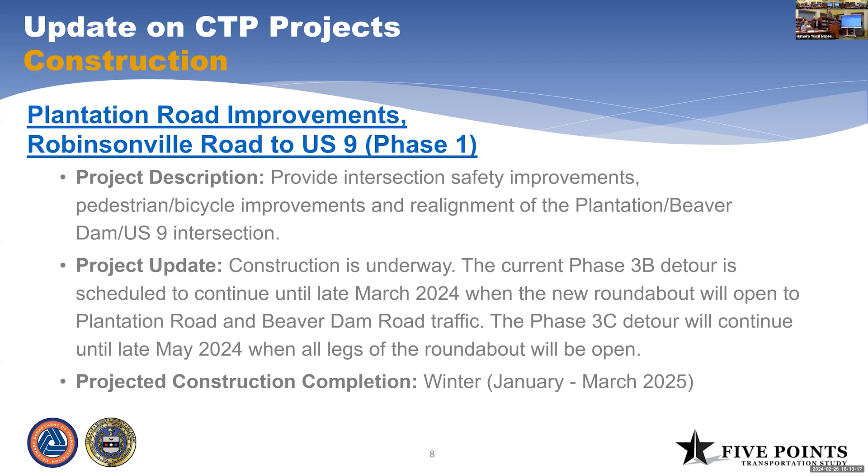I've met a couple times with the group to talk about Plantation Road, so I figured I'd give an update on where we're at. For anyone not familiar, it's a project at 5 Points where we're adding a roundabout off to the west of Plantation Road to help with getting traffic through what's unfortunately known as Malfunction Junction. The project's been underway for about a year now, and we're right in the middle of our very impacted detours that have been going on since around Thanksgiving.

To start, going back in time, we closed Plantation Road, Beaver Dam Road, and the Route 9 connector back in November. There was a small subphase where we had to keep that Lowe's entrance open. As everyone knows, Lowe's has 2 new entrances built off of Shady Road, so we were trying to make sure everybody could get in there for the Christmas holidays. Once they finished that, we switched and moved the road closure down. As far as the traveling public went, everything pretty much remained the same.

The detour was next. So the next big thing that's going to happen, we're almost into March. As soon as we can get the hot mix plants open back up and weather starts to break, which seems like it's happening now, we're going to get this thing paved and reopen the Plantation Road to Beaver Dam movement for everyone, so we will not have to go around that. Now with that, this is what's going to be open out there.

As you can see, we'll have Plantation Road, you'll be able to use the roundabout, continue on Beaver Dam, but we're still going to keep the connector to Route 9 closed. So there will be no way to get from Route 9 to Plantation Road outside of the detours we have in place now. That's a little more complicated getting that connection finished, so we're going to be working on that and have it open by May, probably middle of the month. Once that's complete, for all intents and purposes, we'll be operational in the final configuration. We still have to follow up and complete work on Plantation Road itself.

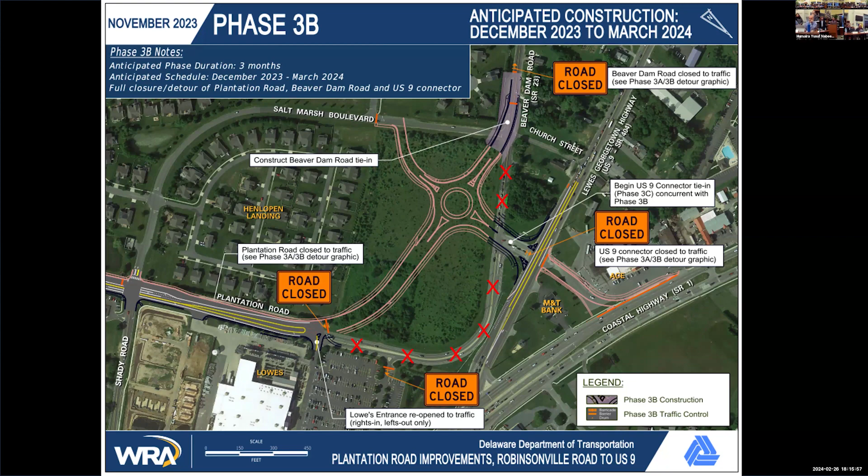Thank you. All right, so the plan is in May we'll get everything open and operational, and then we'll have about another 9 months or so of work to continue on Plantation Road. It's kind of slow going, but we're going to maintain all the traffic capacity there and be minimally impacted unless necessary.

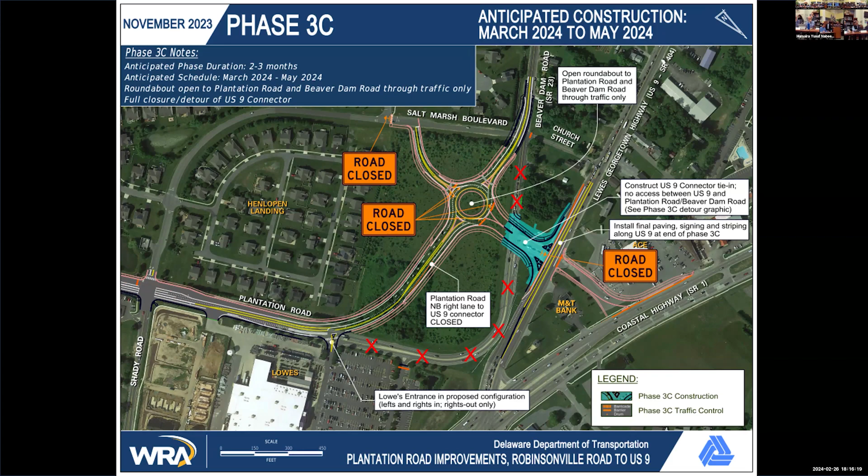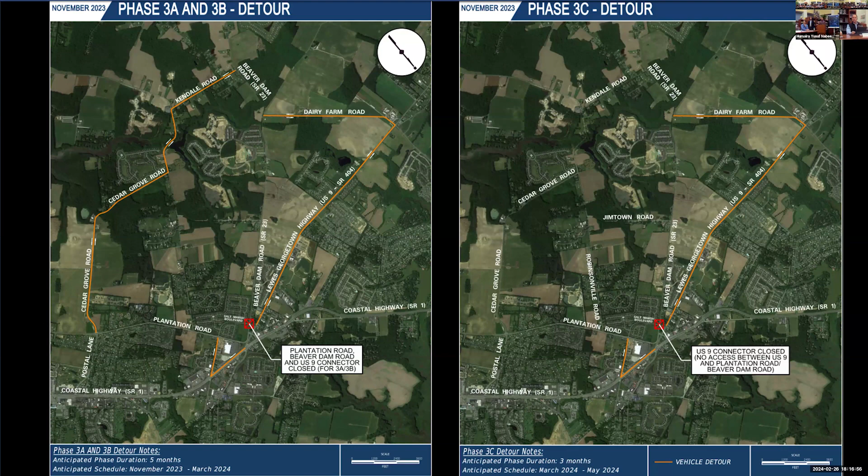These are the detours we have in place. I don't think I really need to go over the routes - everyone's been taking them for long enough now. I will add that before we put the detours in place, there were some concerns with some of the intersections on the detour route or alternative roads people are using. Our traffic section did add a four-way stop at Beaver Dam Road and Dairy Farm Road, and also Robinsonville and Cedar Grove Road. As it stands right now, they're in the data collection phase to see if they're going to remain in place once we pull the detours, because we're sending a lot of traffic there. We're helping to mitigate it, and we'll see moving forward what we do with that long term.

Other than that, that's pretty much all I have for the project, and I will hand it over to Sean. No, not yet. All right, not yet. So a couple things.

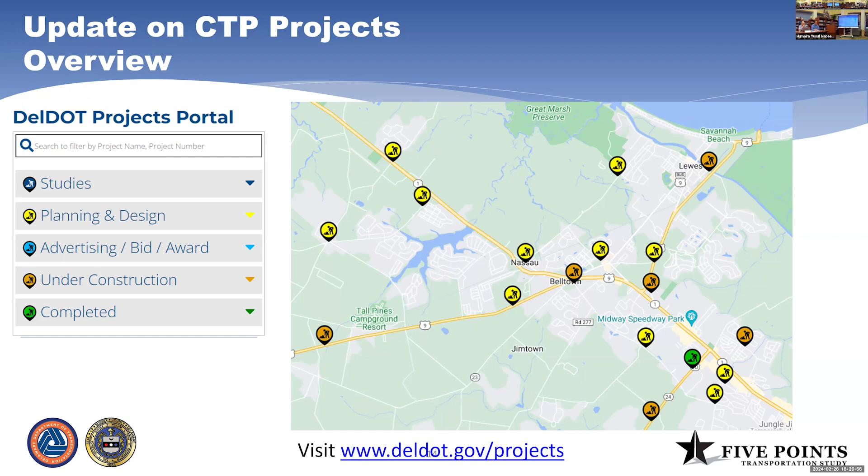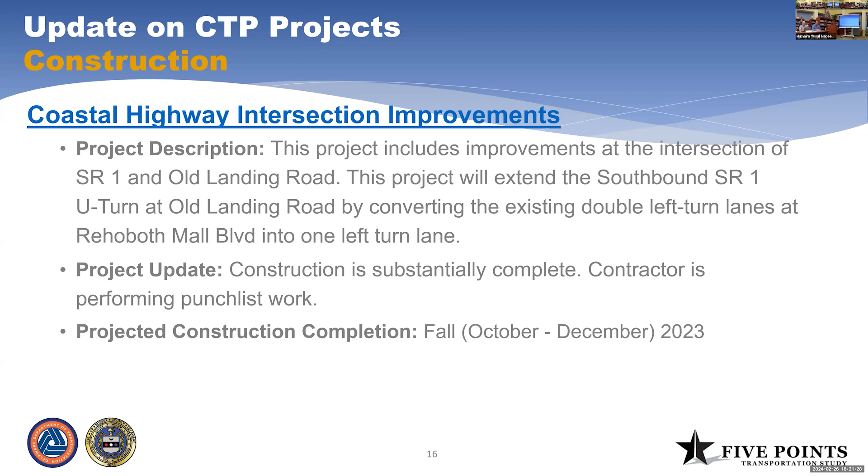We're going to roll through construction projects first. As many of you know, we did a small intersection improvement project at Route 1 and Old Landing Road, lengthening the left turn lane in the southbound direction. We thankfully got that open right before the holidays last year, so that is substantially complete. It was easy in terms of being able to use the existing roadway, reconfigure it, and make a huge operational improvement as well as safety improvement. You can see it right there in front of the shopping center.

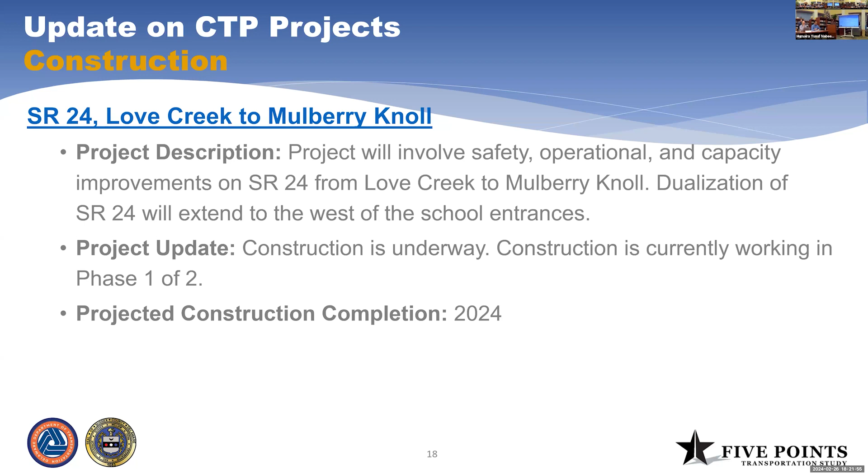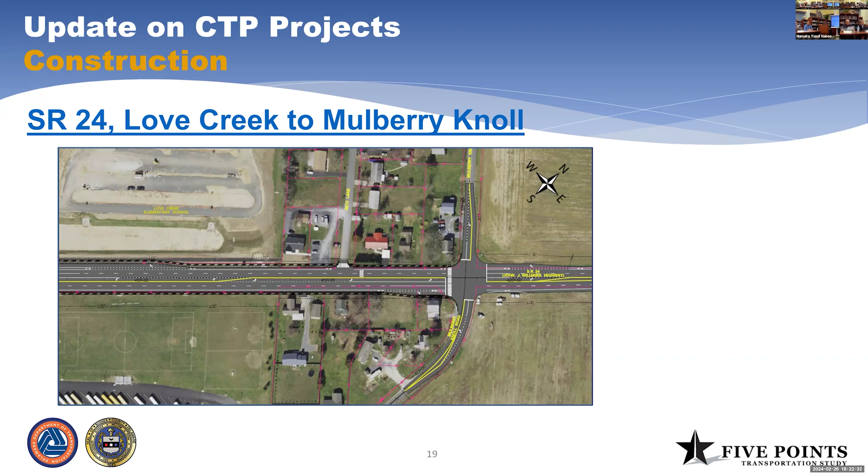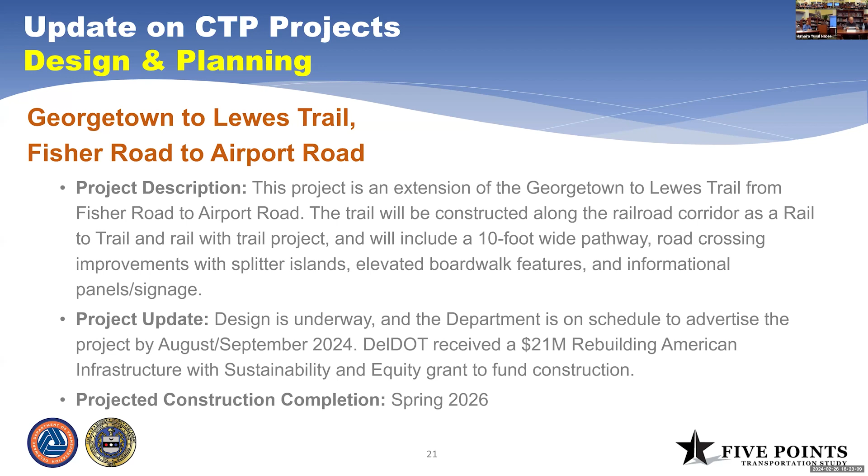All right, moving to our long list of design and planning projects. The Georgetown to Lewes Trail—this is really the last segment to get done. It's a long segment to complete the 16-mile bike trail from Lewes all the way to Georgetown. We did get a $21 million RAISE grant to complete the construction, so that project is wrapping up design. We plan to begin construction hopefully later this year or early 2025, with completion in 2026. We're really excited about this project—it's a really viable way to get from Georgetown to Lewes without adding to the traffic craziness we experience all the time.

The new road bridge, Bridge 3-714, we have the design underway for that. We plan to begin the advanced utility work in the fall of 2025, and then construction for the actual bridge project itself would happen the following year. We have a lot of utilities to move. This project will both raise the bridge as well as the approach roadways to deal with the daily flooding we're experiencing on that road.

The reason for the delay in construction start was twofold. We have wetland mitigation that we have to do for the project, and so we actually had to go out and find land to be able to do that mitigation. A lot of times we're able to mitigate right on site, and we weren't able to do that for this project, so we actually had to purchase property. We have to get the mitigation site up and functioning.

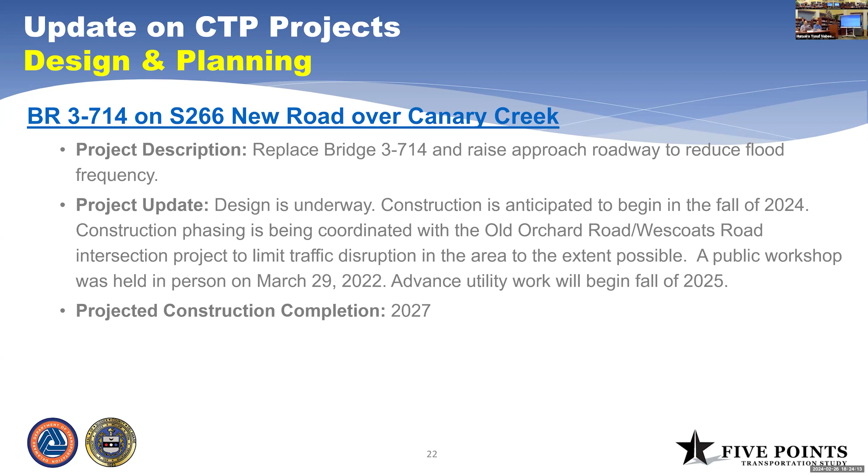That takes a little bit more time, and we're coordinating this project with Old Orchard Road. We didn't want those two to be under construction at the same time, so we're pushing forward with Old Orchard, and I'll talk about that in a little bit. This project will follow on afterwards. You can see the rendering for it, raising it to get it out of the flood stage and raising the approaches.

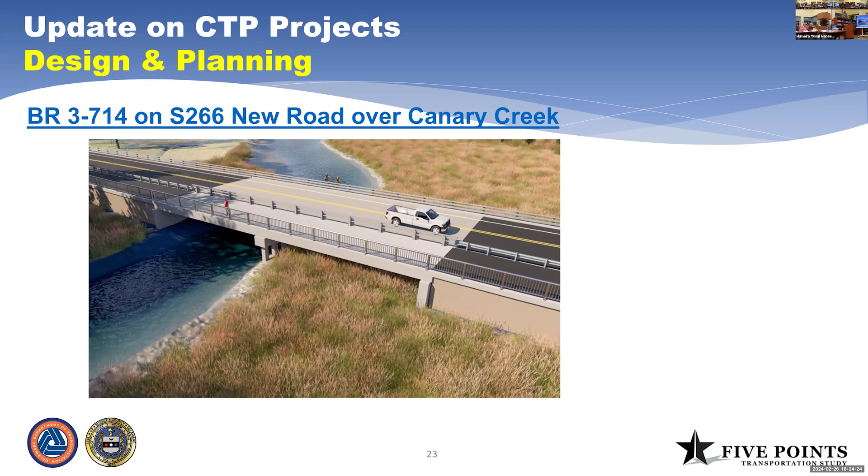We have a couple of projects at the Hudson and Steamboat Landing intersection, Eagle Crest and Oyster Rocks intersections south of 16. We're looking to channelize left turn movement both on Route 1 as well as coming off of the side streets. But we have to coordinate that with the 1 and 16 project, and also with a lot of the events that are now happening at Hudson Fields. So we're still analyzing what we need to do there.

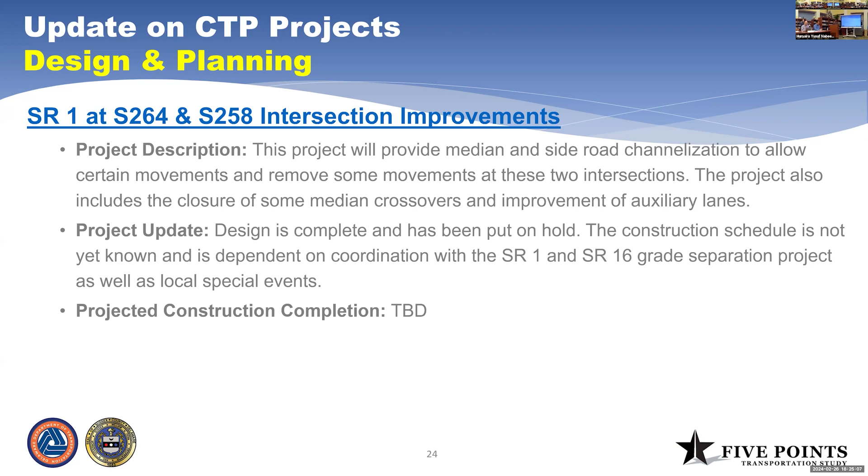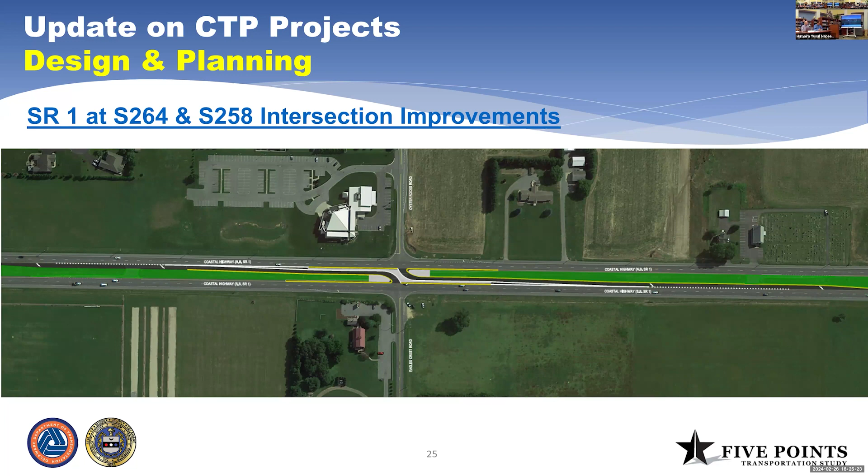This project is a TBD in terms of beginning construction, once we figure out the best path forward in terms of how to channelize the lefts. As it stands today, at the Oyster Rocks, Eagle Crest intersection, we were looking to allow left out movements there. But if you're making a left from Route 1 onto either of those side streets, you'd actually go down and make a U-turn. Hudson Road was the opposite - you'd be able to make a left from Route 1, but any left out movements would have to do a right turn, U-turn, and or use Eagle Crest. More to come on those once we have a better path forward.

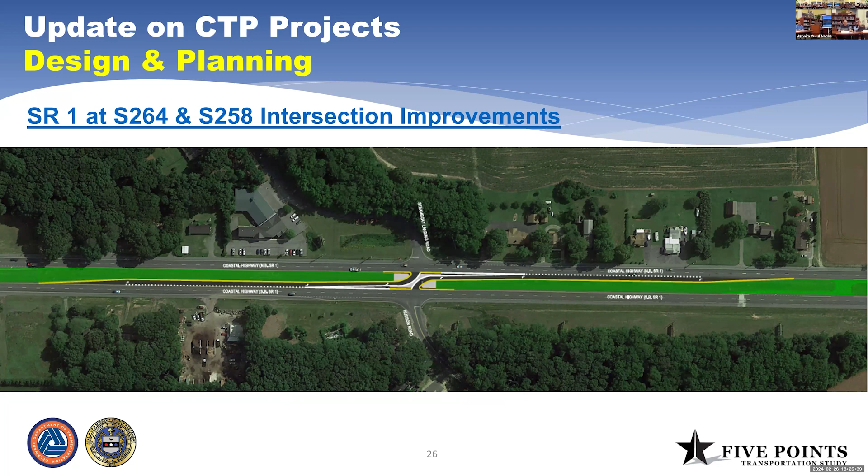We'll do a couple on Cave Neck, Hudson, and Sweetbriar Road. This is a project that we coordinated with the county with what we're calling the fast track funding, where the county advanced funding for us to be able to begin the design, right of way, and construction, and then we will pay them back when it was scheduled to go to design in our CTP, which is much later. We are planning a 5-legged roundabout at that intersection. In the interim, we did do the all-way stop.

As somebody who goes to the intersection twice a day, it has made a huge impact in terms of safety. You're no longer holding your breath, wondering if somebody's going to come from the side and you're not going to see them. But the roundabout is the ultimate solution there. We are acquiring right of way currently, and utility work will begin in 2025 on that project.

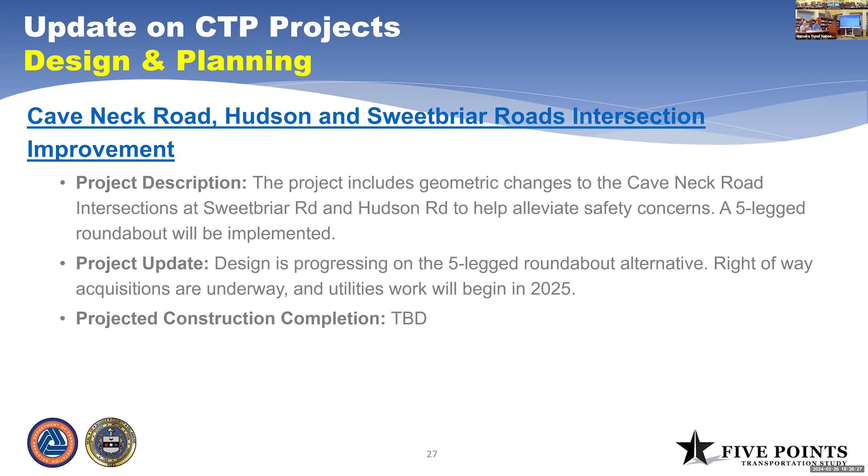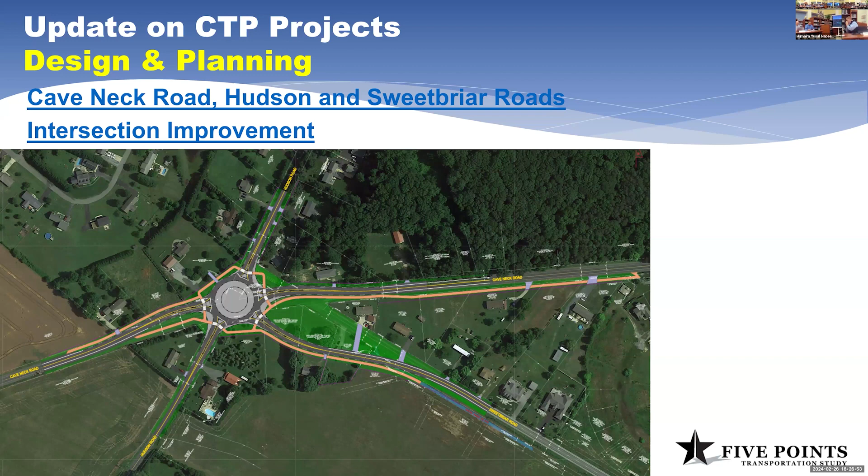But keep going, Shante. So this is the schematic for Cave Neck, Hudson, and Sweetbriar, having the shared use paths and being able to accommodate all of the different movements at those two closely spaced intersections. Next is the Cave Neck grade separated intersection project.

That project proposes a bridge basically to carry Cave Neck from one side of Route 1 to the other, along with service roads to be able to facilitate access for the properties along Route 1, both to the east and west sides. We are acquiring right of way currently, and the design is progressing really well. We anticipate beginning construction in the spring of 2026.

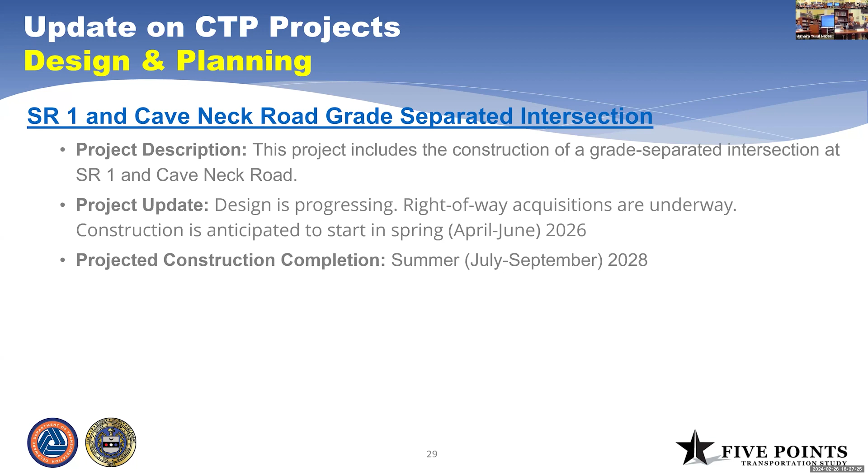And this is the concept for that project. You can see the bridge across Route 1, connecting both sides of Cave Neck and the service roads up and down, also connecting some of the roads that intersect with Route 1 further to the south.

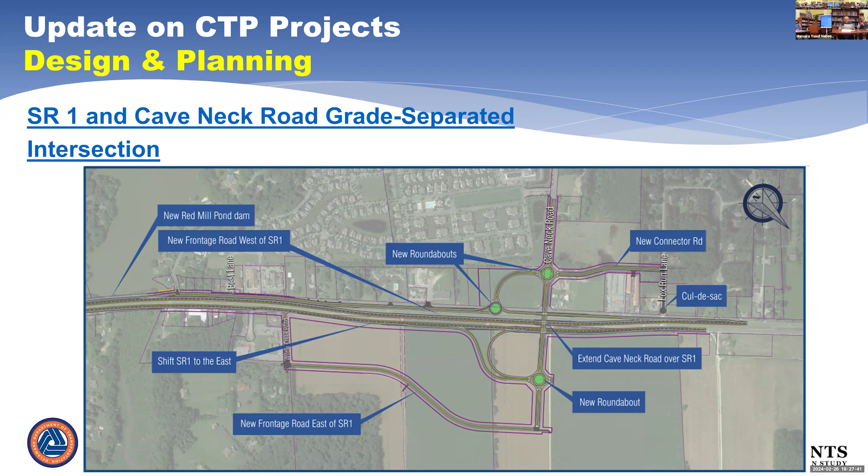Route 1 and Minos Conaway, also a grade separated intersection project. This one, we actually get to use the bridge, the Nassau Bridge that exists today. We don't have to build a new bridge, but we'll be building service roads on either side of Route 1 and making a new connection under the bridge to get over to New Road.

That project, design and right-of-way acquisition are just about wrapping up, and we hope to begin construction later this year. This is the southern section of the project. You can see the two roundabouts that connect under the Nassau Bridge, and then further to the north, connecting all the way up.

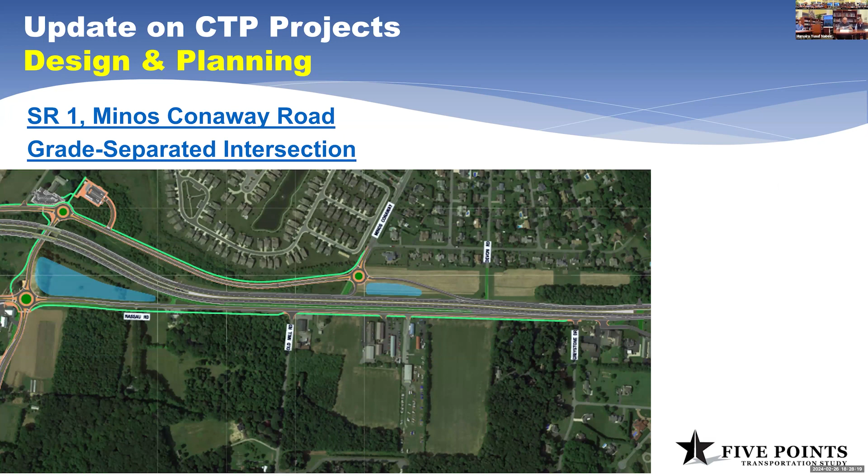Talked a little bit before about the realignment of Old Orchard Road at Wescoats Corner. That project is going really well. Design is nearly complete. We've got right-of-way acquisition just about wrapped up. We have some advanced utility work that is underway.

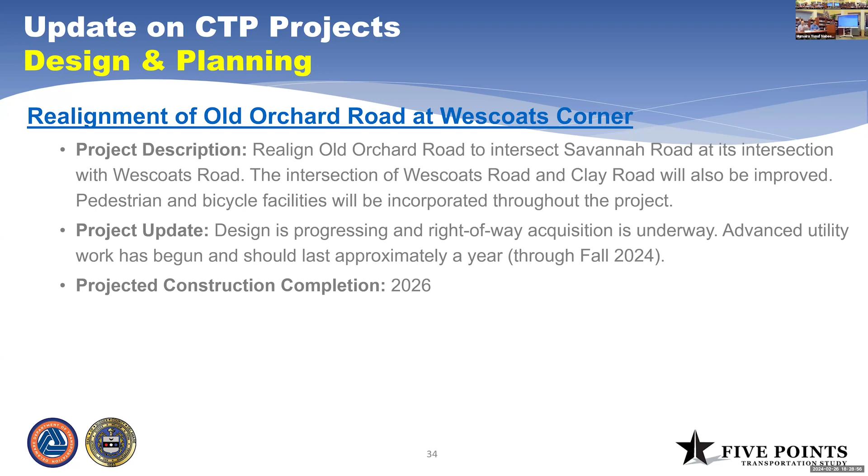So this, where it says through fall 2024, is actually through next year. We're going to have a little bit of overlap with the roadway construction and utilities, because we anticipate beginning road construction sometime next spring or summer. And a lot of the preliminary work for this project will be what we call off alignment.

Yes, Bob? Bob Fisher again on the graphics. It appears like a number of these graphics are either missing traffic lights in them, or there is some sort of code that I don't know, that indicates there's a light there without the little red, yellow, green.

Yeah, we can add that, Bob. So this is already a signal, so that's why we don't have it. We typically would put that if it was a new signal, but I hear your point, and to make it clearer, we will go back through and update these.

So are these graphics that you're presenting in general only the changes that are being made, and not the way it's going to look when the whole project is done? That's new to me too. I thought that was the way it would look.

So that's a broader question - you all, whatever you decide. Yeah, we can add the graphic for a signal there. We typically haven't done that. If you look historically, if there was a signal there, we didn't put a new signal graphic, but I get your point, and it may be confusing at first, especially when we're doing some kind of new connections. People may think that you're taking the traffic light out if you don't show it at the final project. That would be my only concern.

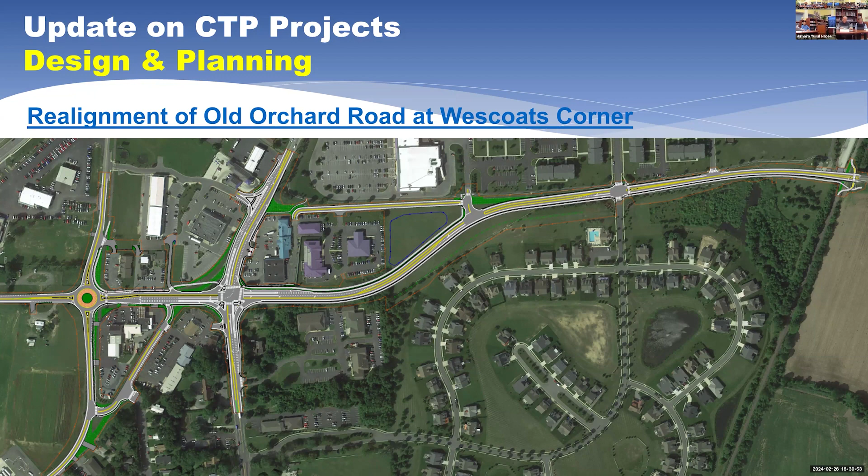In terms of traffic impact, we may still be finishing up construction on this project, but as long as all the lanes are open and everything, we can start the road. Right, but just want to clarify. Thank you.

Route 9 and Kings Highway, so that project is under design. We did have a public workshop last week on that project. We are still kind of finalizing the overall design, so had the workshop, we'll be taking comments in through, I think, March 22nd, I believe is the date.

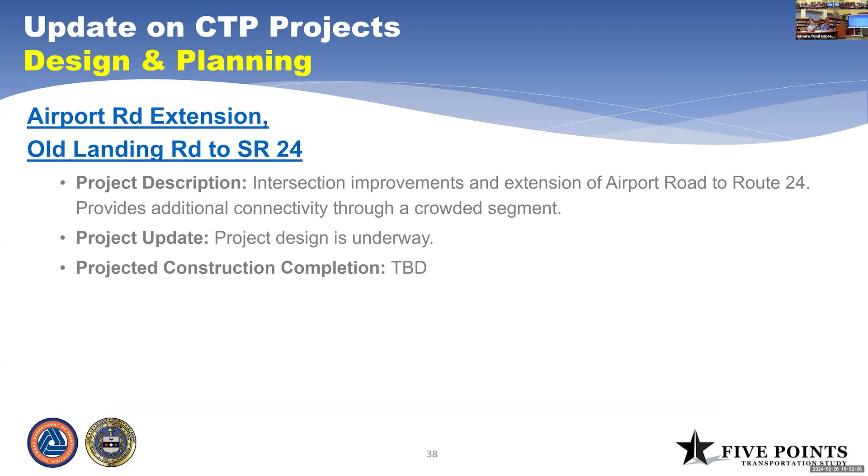Airport Road Extension, so that is creating a new connection between Old Landing Road and Route 24. That project is in the very early stages of design. Again, we've had one workshop on it, presented the various alternatives. We're still kind of analyzing and evaluating everything. We'll be putting out the final concept that we'll be moving forward into design. Then again, once we have that, we can give a better schedule for construction start and completion.

Doing great. Okay, and then the last two projects, I'm not going to go into a ton of detail on because they are very early on. So for this new road, Nassau Road to Old Orchard, that project will actually begin design next fiscal year.

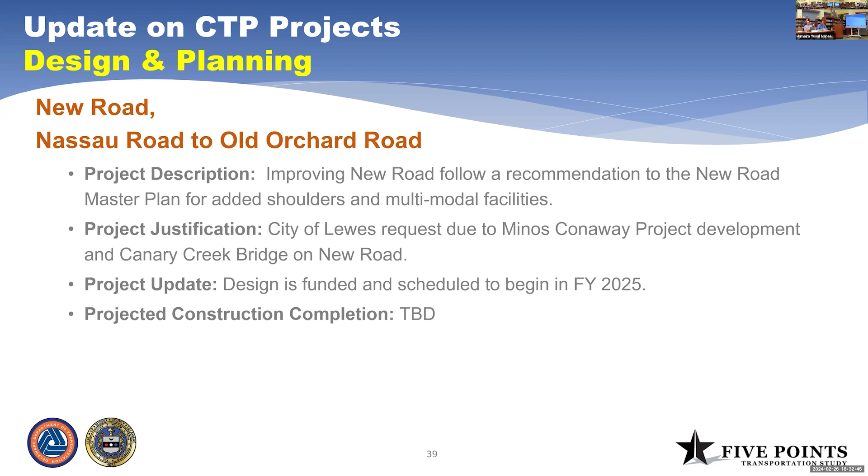That starts in July of 2024. We will start the public involvement process, developing alternatives at that point, and have workshops.

US 9 widening, that project is very early on in the design process. It is funded for design, and it looks to widen Route 9 from Old Vine Road to SR1, 2 lanes in each direction. We're currently evaluating how you do the widening, the impacts, costs, all of those things.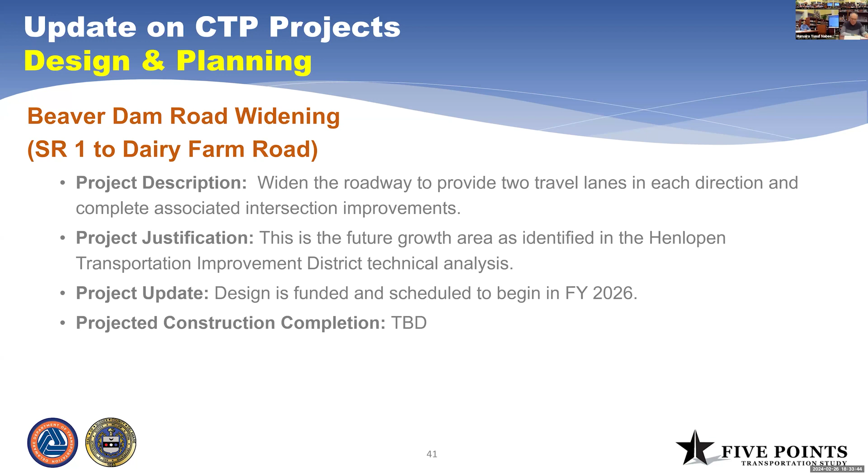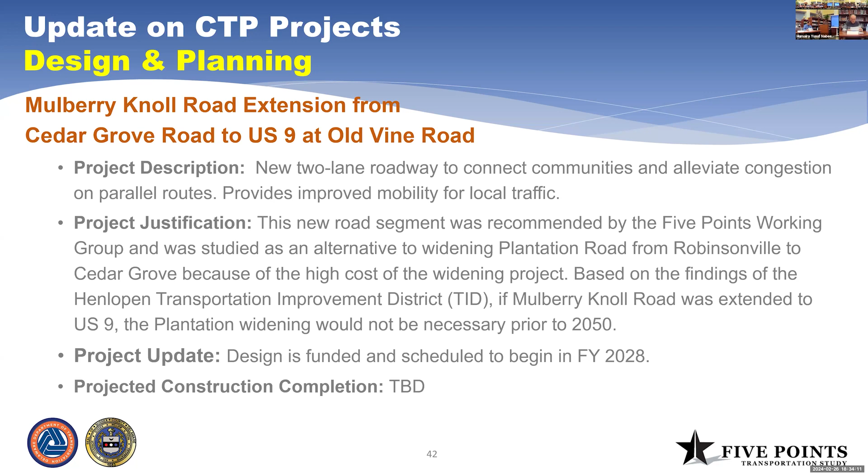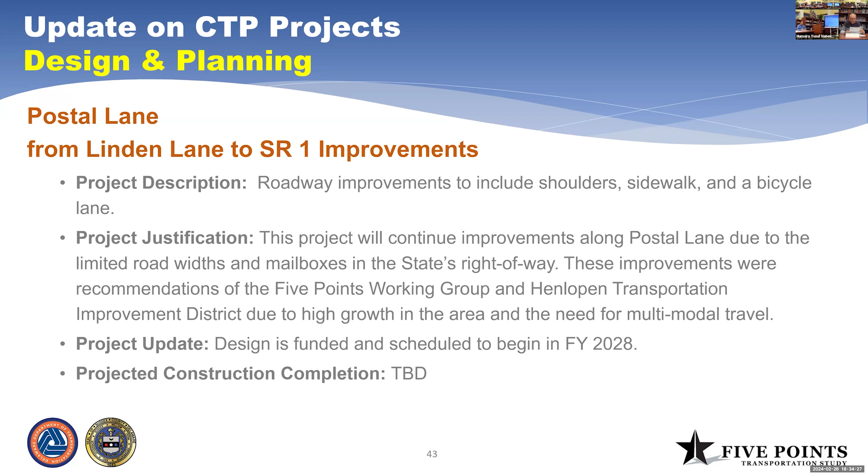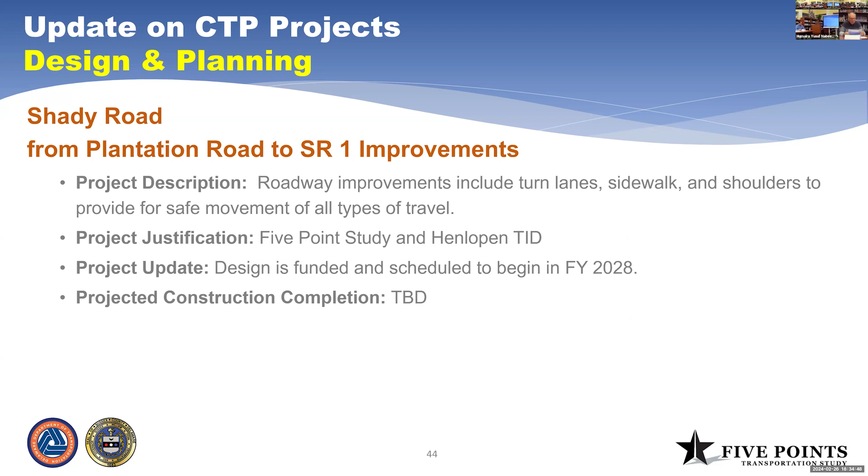The last project on the list is Shady Road, again looking at turn lanes, sidewalk, and shoulders for safer movement of traffic, walkers, and cyclists. That's another project coming out of the 5 Points study, as well as the Henlopen TID, also slated to begin design in fiscal year 2028.

Before we get to questions, I feel like I'm going to have a dream tonight that Shantae is on Jeopardy in every category, and it's still improvements in Sussex County. Just going to run the board.

Any questions or comments from anyone? Yes, Mary Roth. Shantae, this is a detailed question, so feel free to say answer me another day.

On Orchard line, there was a lot of utility work when Delmarva and the city did their pieces. There's where the world's largest utility poles arrived. There's still a lot of the old utility poles out there that still have wires and other things connected to them, in and around the Savannah, West Coast area, and a little bit of the Old Orchard section. Brian, I'm going to bring him in. Okay, he knew already.

I'm trying to get a sense of how many of those poles are going to go away when the project is underway. Yeah, so good question.

The reason mostly is that the transmission poles, the real large ones, can only go in about twice a year, spring or fall, when the weather's pleasant, so we don't cut people's heat or air conditioning. So a lot of coordination goes into the time of year that work should happen, and we have the right-of-way factors into that as well. Timing worked out for that last fall for all of that to go in.

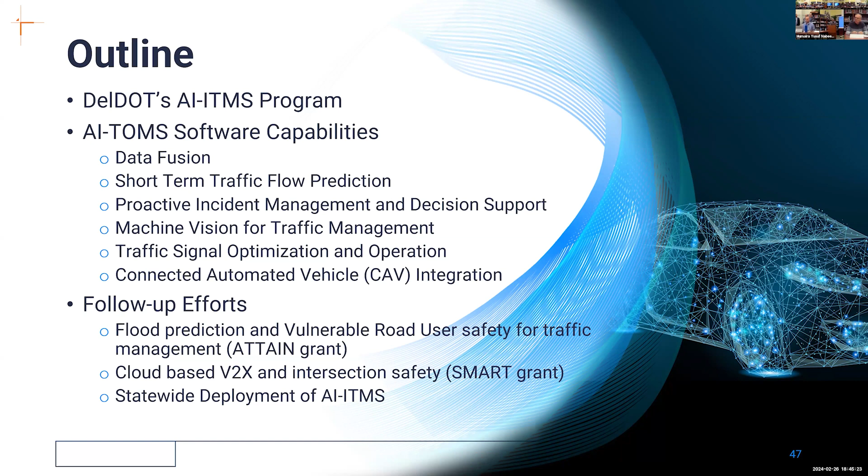As it shows here, a variety of systems monitoring that I've already talked about is what we're working on. This new program started with a $10 million grant. We were 50-50 on it, and we competed for that grant. And since that time, that is the foundation of building the new system.

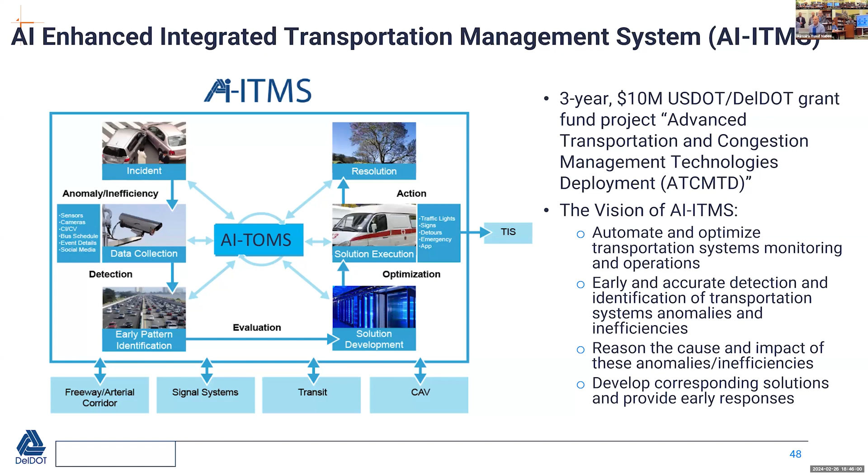All right, you can see our Chris Myers, who runs the daily operation in the center. And all of those functions that you see right there are managed through the system and at the TMC. So from weather to whatever impacts the transportation system, we have technology to monitor, and then we work with the rest of the department on how to respond to any problem.

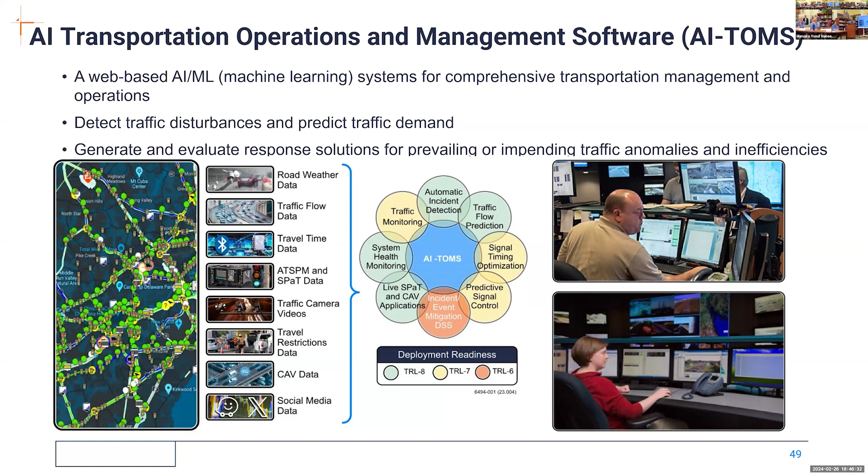I won't go through a lot of the details. I just talked about the traffic monitoring, the incident detection capability, the prediction capabilities, third-party data. We get data from WeJo and other companies that are supplying data, and that's integrated into the system also.

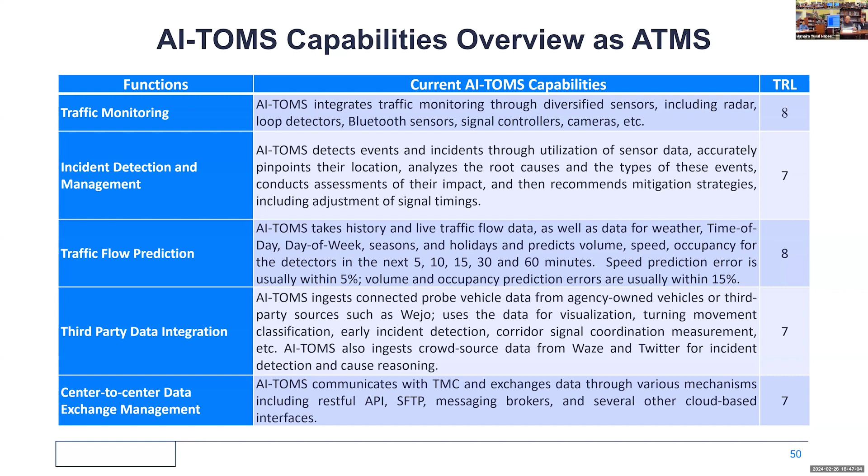And then center-to-center operation, timing plan management and reporting, automated traffic signal performance measures where the system will monitor how things are operating. And then where we're really heading is the signal system will adjust the traffic signal system.

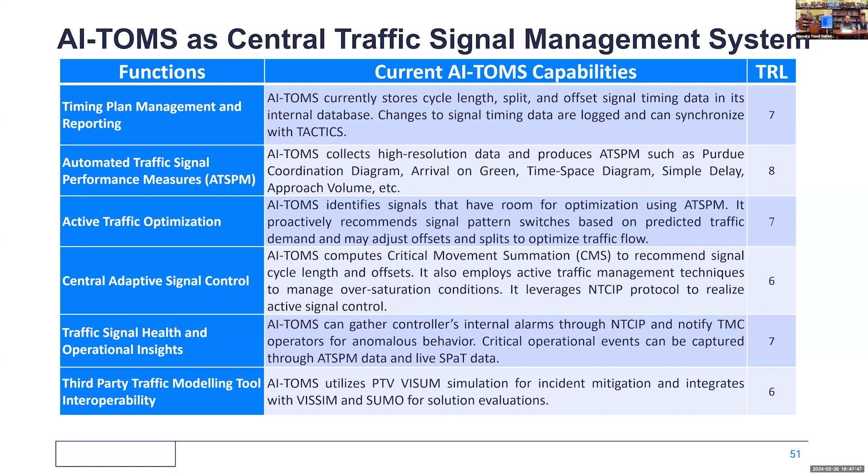When we first started on this project, the company we're working with said, well, we'll sort of advise the technicians. I said, I wanted to take care of the problem. Advise the technicians, but take care of the problem. And so that's being built into the system.

I want to go through this quickly so we can answer questions. And vehicle classification - there's technology we're using, whether it's a truck, a car, a bicycle, or whatever. And we're testing that technology now.

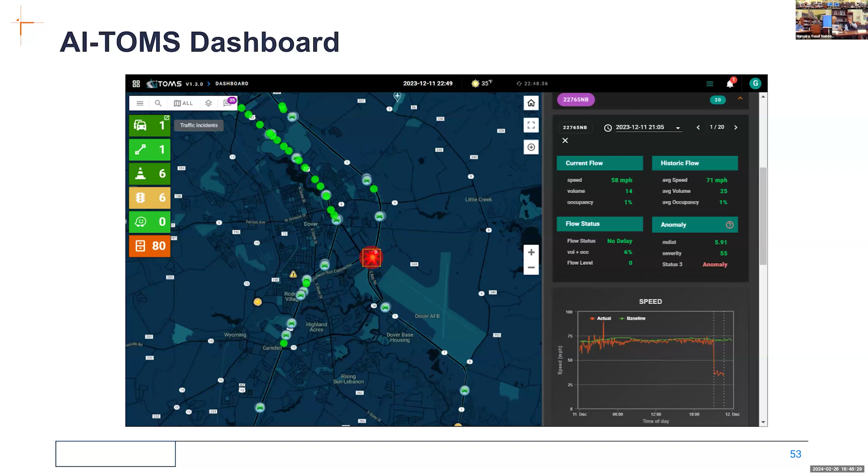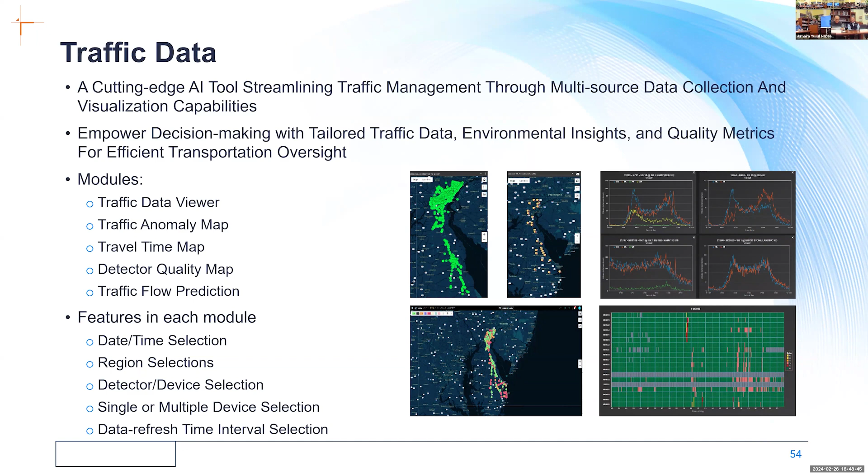There's a new dashboard for the technicians and engineers at TMC to use, and there's a whole lot of information on what's going on in the statewide system. Without going into all the traffic data, we see all the sensors, we see all the data coming in, we understand travel time and everything else. I've talked about traffic flow prediction, and that's a key part of the new system.

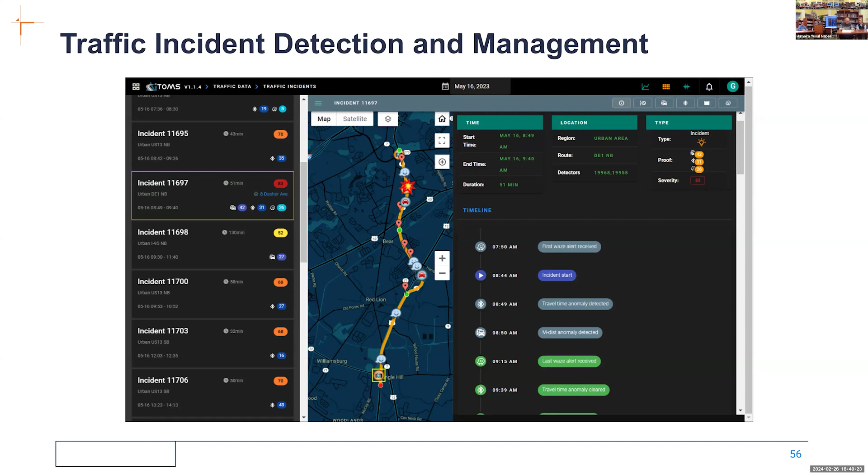Traffic incident detection - we've already found that the system is detecting an issue before we get a message from Waze. Well, that's pretty good, and so it has a lot of potential. It's identifying a problem real quick, and that's what's really going to help us do. And the accuracy, if you can see it here, for something major, it picks it up 100% of the time. And even then, if it's something minor, it's 88% of the time. So it's pretty smart.

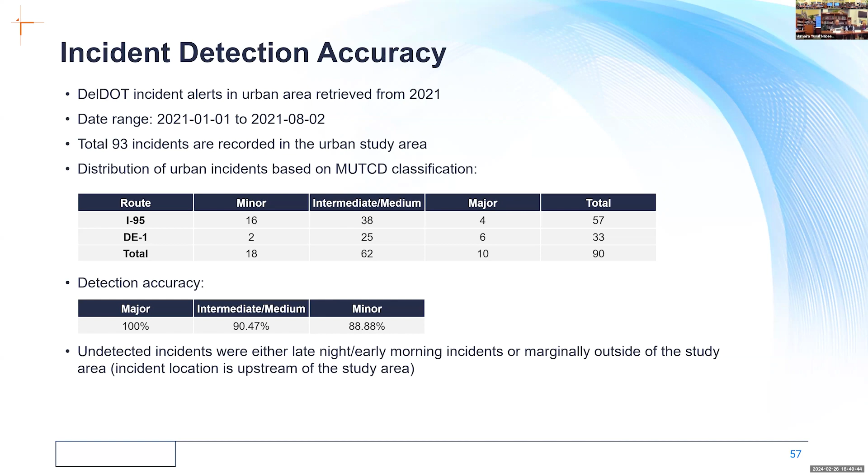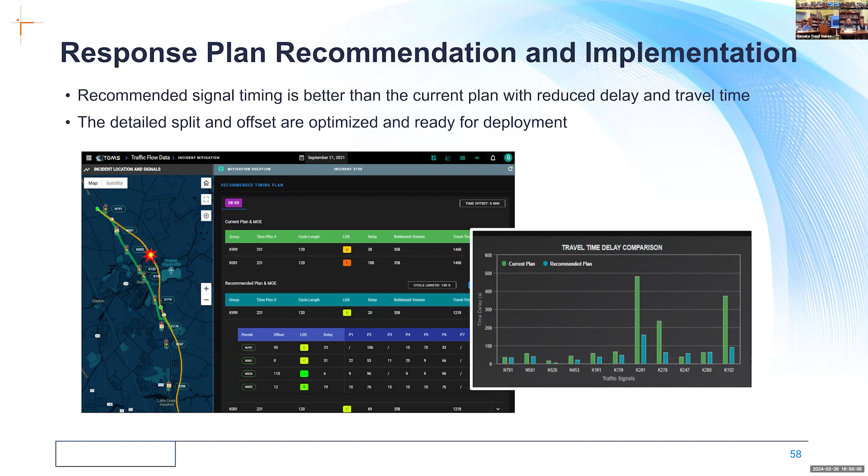The other thing we do is when there's a problem, people like me determine how we're going to reroute traffic, how we're going to time all the signals, all of those things. We're building that into the system, where it will know all the routes and make a determination how to reroute traffic.

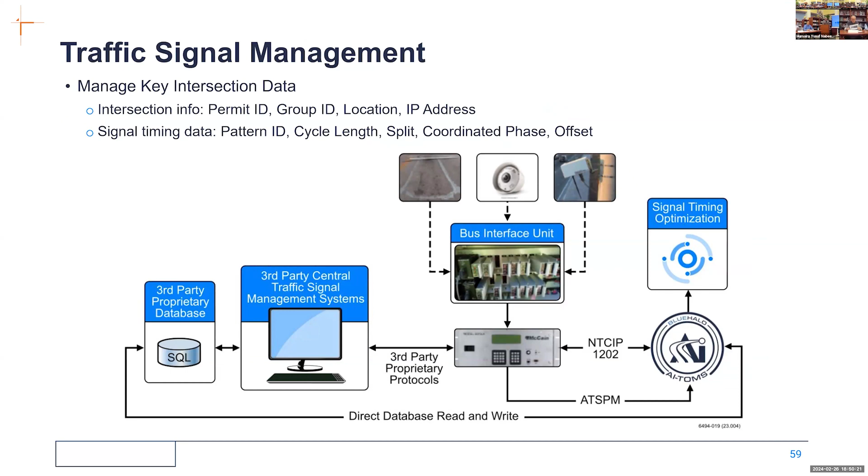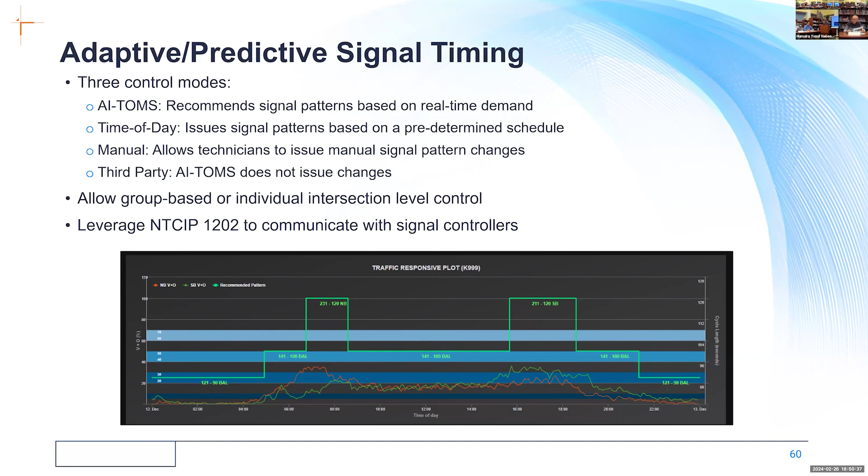And then managing the intersection, there's a variety of technology. I don't want to go into all of that, but you're going to see more and more advanced technology as we move the system further. Again, it's going to be adaptive and predictive, with all the sensors figuring out the proper cycle lengths. That's really going to help advance things. And it's also looking at how it performs—if things get better or worse, it learns not to do that again. That's being built into the system.

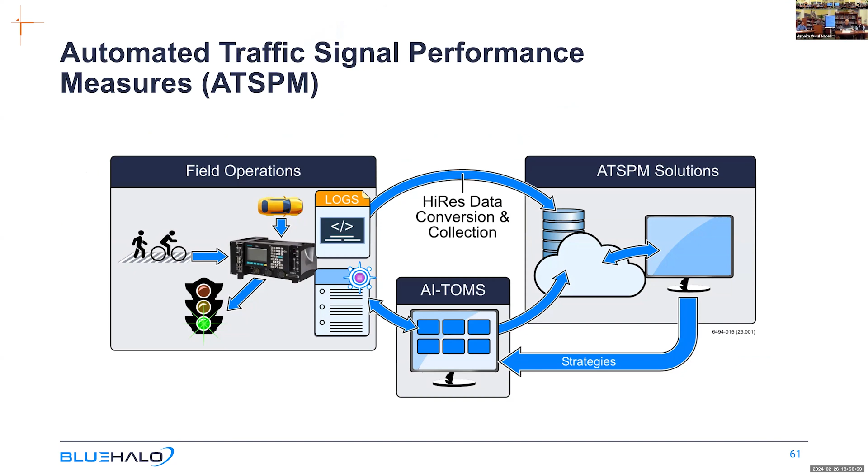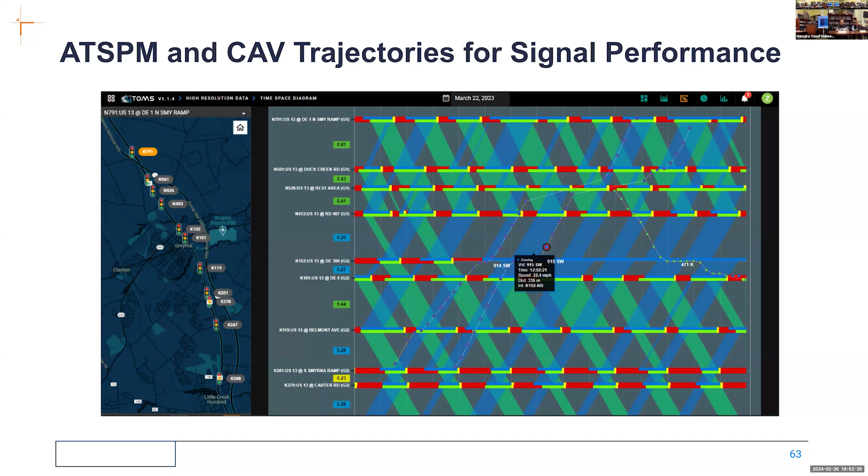The other thing we're testing, like with my vehicle, is equipping more and more vehicles with tracking. As I drive through here every day, or over on 113, that's all being tracked, and it's matched to how the signals are working. So as we put more vehicles out with the technology, that will help the system and us better time the traffic signal.

SPAT—you're going to hear this as the connected automobile comes into your vehicle. SPaT is signal phase and timing. We want to make the system safer. One thing we're working on: if the system senses you're going to run the red, we plan to hold the red. We're going to try to reduce those types of accidents with the technology. There's a variety of things this technology will allow us to do that will make the system safer.

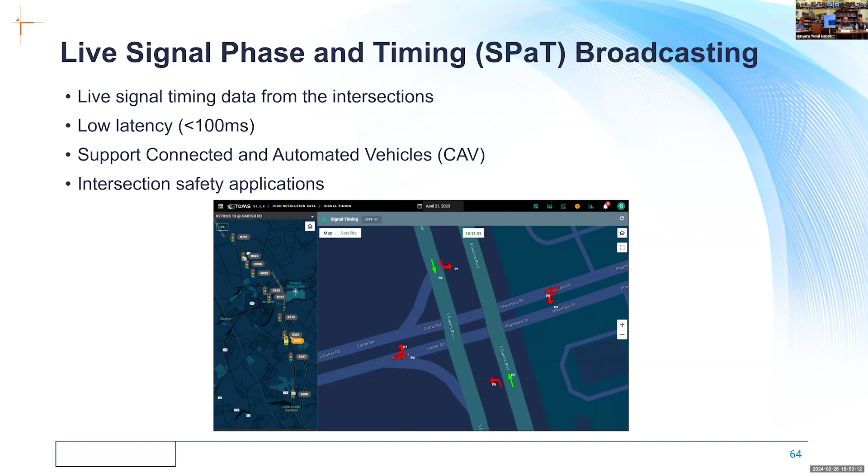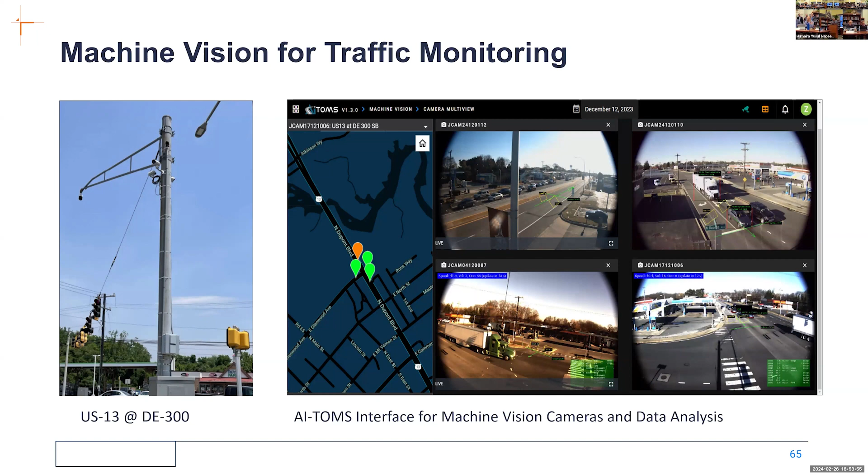Machine vision—Big Brother is watching. We're putting in sensor technology that watches intersections, and that data is going to help us time the signals better. We do turning movement counts to figure out how to time the signals, but this will make it so it's 24 hours a day, 7 days a week, and we'll know the turn movement counts. We'll also know the type of vehicles, whether trucks, cars, and so on—tons more data we can use for planning purposes.

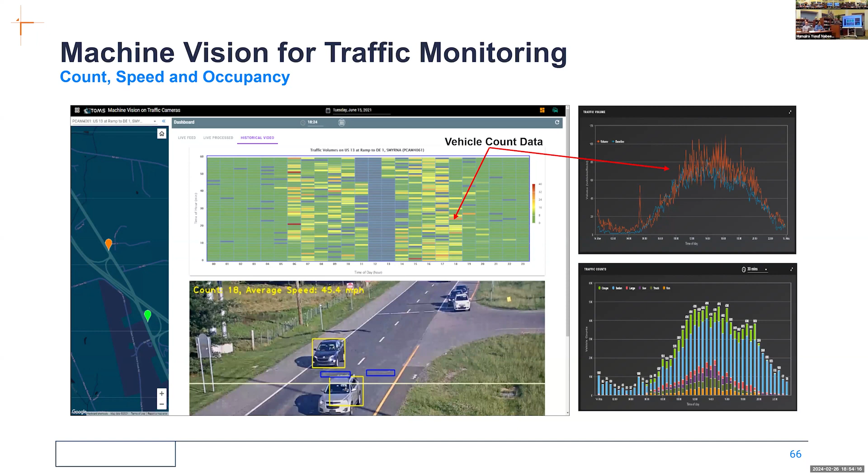With machine vision, we're already tracking vehicles through intersections. We know we can do that, and it helps us improve safety, the timing of the intersection, the timing of the corridor, and many other reasons.

And then connected vehicle data—I went over that. The more vehicles that are connected to the system, the better the data, and the better the system can operate.

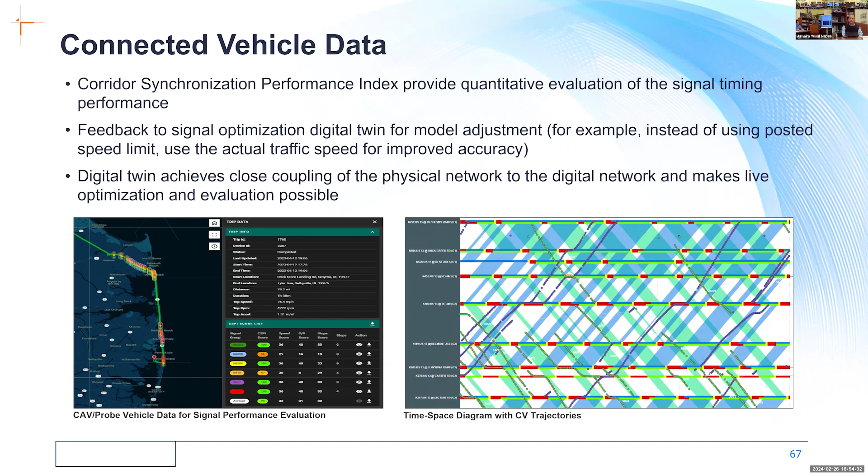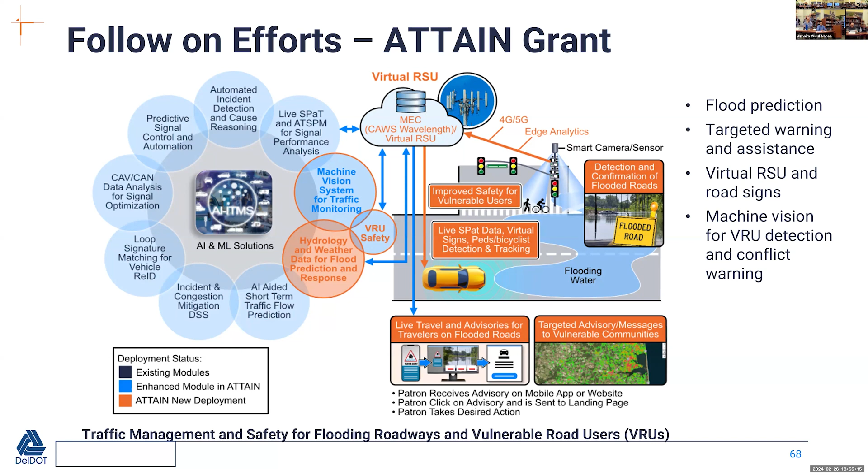We also competed for another grant and were awarded it—that's the ATTAIN grant, where, as I mentioned with flooding, we're going to make the system smarter to monitor flooding and monitor how we move traffic related to an evacuation and those kinds of things. The system will be more automated. With all this information, we work closely in Delaware with police and fire, as a pretty cohesive team. The more data we have helps everybody consider the process.

So, people—we hold a signal red, we provide information to drivers. This is a big safety feature and a way that we can reach thousands of vehicles with this technology.

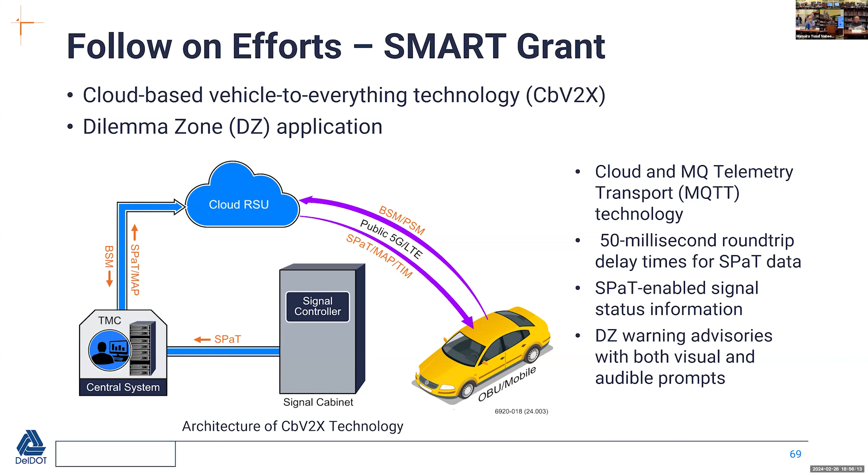And I try to simplify this. I've been doing this 27 years here, and I did it 27 years with Montgomery County, Maryland. So half a century I've been playing with signals. It's getting more advanced, but the basics are, you do three things.

Control, running the traffic signals, those kinds of things. Monitoring, just like I talked about, you have to monitor. And then we have to provide information.

If you've used the DelDOT app, or you've used any of our tools, we have a lot of things that can give you real-time information. So that app, eventually here shortly, you'll start to see more signal time stuff.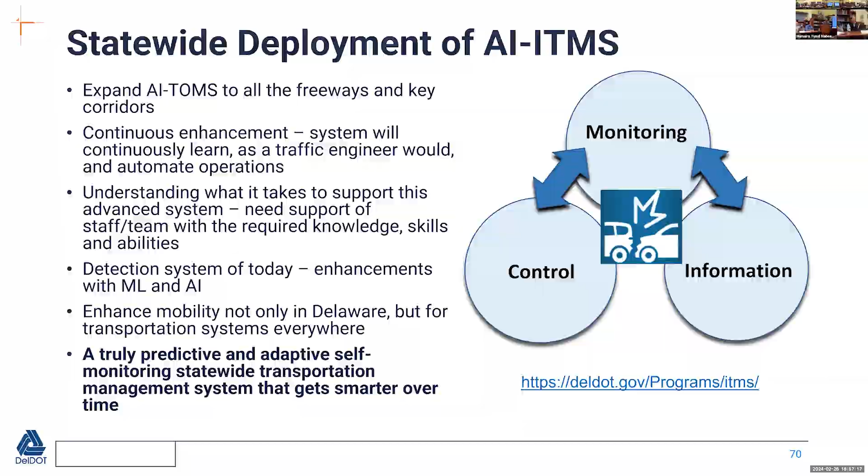All right, thank you. So now ask me questions. Yeah, Bob, I'm gonna go to Lloyd first, and then come to Bob. This is Christmas Day for Bob Fisher, all right, this presentation. It's engineering. Lloyd, go ahead.

Hi, Lloyd Smith. As you put in the new traffic signals, are you putting in the wiring to accommodate the accessible pedestrian signals with push buttons and all? Yes, so they'll be there if somebody wants. Very good, thank you.

Bob? These will be easy to answer. First, are you working, is anybody working with the automobile manufacturers to have them come up with a semi-universal way that every automobile has a way to interact with these new systems? Is there some effort across the country to do that? Yes. There's multiple meetings, there's multiple tests going on.

I think the automobile industry has to understand what we are going to do. They can't really put something in the vehicle, they test it and all, but for them to make that major investment of putting this type of technology in each vehicle, we have to be ready and exchanging information. AM stereo was the same way with the FCC - there were 10 proposals, not one was adopted by the FCC, so we don't have AM stereo today, otherwise we would. The second question was where you have monitoring, control, and information.

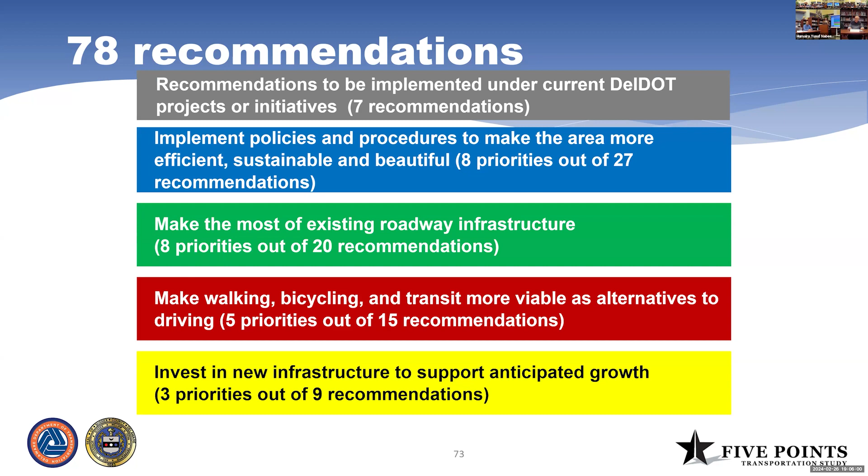Tonight we're just going to highlight a couple that have gone from in progress to complete, which is what we track here at the working group. We did not have any changes in category A, but 6 of them are already done, checked off the list, and only 1 remains in progress.

So that one in progress is actually the signage under the Nassau Bridge area, which will be addressed by the Minos Conaway project. We heard a little bit about that earlier. So Brian and his team will be making sure wayfinding signage is available there to direct folks where to go, whether you're using the trail system or driving.

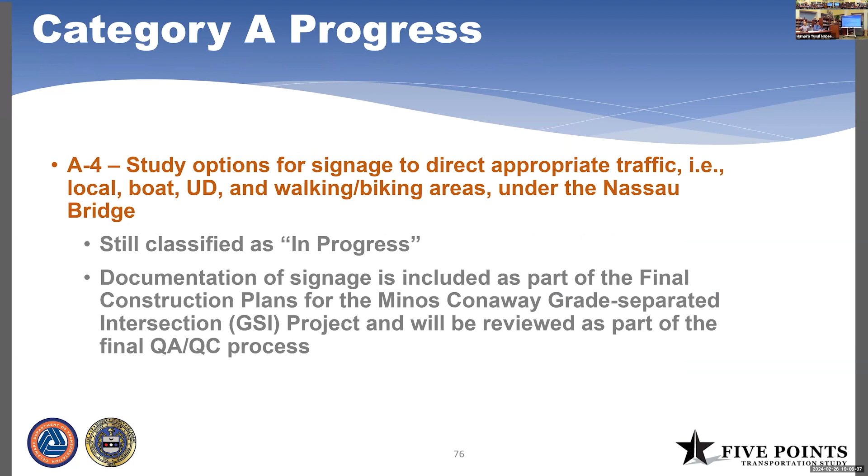So again, this was a critical issue when we met. Moving on to our policies and procedures, we have a couple kind of moving from long-term into in progress, and in progress to complete. So one actually is in Gene's wheelhouse, which is the parking management system. And you'll see it's study the feasibility.

So we know often people are driving down from upstate and they want to go to, say, Cape Henlopen to the beach, but the parking lot may be full, and those folks don't know that when they're on the way. So we have been working with Gene and his group to see if there's a way we can better communicate the status of parking at the park and other critical destinations to folks before they make their way down this far. Unfortunately, as those of you who love the park know, there's a lot of places you can put a car, including on the beach.

So it's very hard to kind of count one in, one out at Cape Henlopen. We did a pilot down at Fenwick Island State Park, where they do have one parking area, and that was successful. But we are still trying to troubleshoot with DNREC the problem of monitoring Cape Henlopen. So, Gene, I don't know if you have anything else to add on that one. If you see any potential solutions at Cape Henlopen, or if that one is assessed and it's probably not going to go anywhere from here.

It's a tough one, as you said, because they're either on the beach with their vehicles or in a variety of places, they're staying the week. Not like Fenwick, Fenwick's worked great, and so we have a sensor there in the summertime. You'll see it come back, that gives us that build, and you can see it on the app what the parking availability is. So it just has too many ways traffic parks to Cape Henlopen. We'll have to work with the park. I don't know how you can fix the problem.

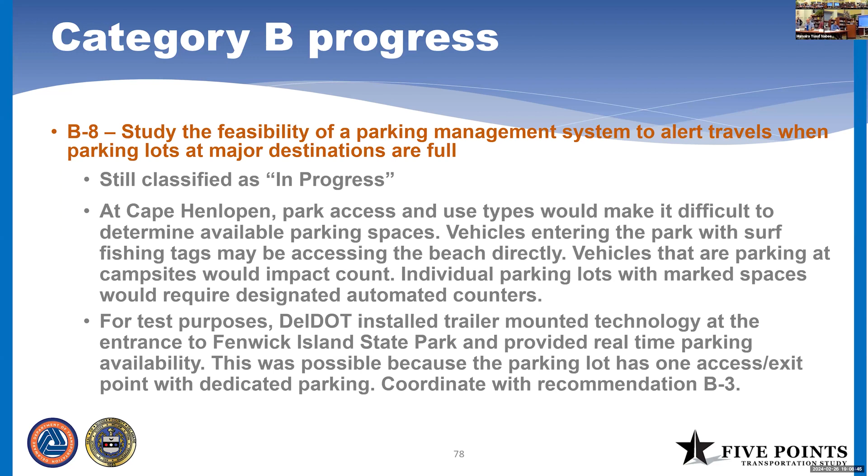But moving on, we have another policy recommendation that is now complete, which is study relaxed height limits as part of the comprehensive plan to increase density. So that basically means change the county's code to allow folks to build up higher. And Todd, I welcome you to jump in if you have anything to add, but Sussex County Ordinance 2889 was just passed this past October to allow an increase in that maximum height for multifamily development. And that's in conjunction with the county's rental program and in proximity to certain routes in the county. So we are considering that complete.

The county spent quite a bit of time analyzing the implications of that and how it could support affordable housing, especially in the vicinity of the beach communities where we know we have a lot of service workers who need to be able to live slightly proximate to where they work. Todd, anything to add? Perfect. All right, thank you.

And lastly, for category B, is drainage issues. So we know there are a number of drainage issues in the study area. DelDOT has been tackling those as they come up based on both community complaints, and as all these projects get designed, we're out there in the field figuring out where there are drainage concerns and fixing them. So this has been underway. It's kind of been sitting though, so we decided to kind of tackle this more formally this coming year.

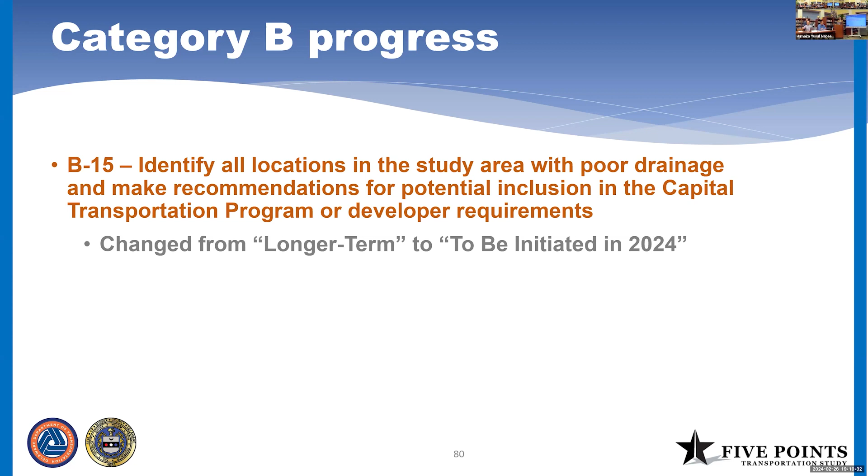We're going to be working with the maintenance division and Sussex Conservation District to get a sense of what they were tracking back in 2017, 2018, and how many complaints they're seeing now. And Brian, we'll probably be reaching out to Brian and his group in PD South to also understand and inventory all the stormwater facilities that are coming in with all these capital projects. So this is one we're going to be kicking off this year with a more direct look.

B18 is about kind of aesthetically pleasing gateways into the beach community. So we do have the Savannah Road Master Plan effort underway. Mary Lowell from Delaware Greenways is a key part of that initiative, and they are looking at that beautification component coming into Lewes, especially on Savannah Road. So that one we are considering underway.

We're raising it tonight to let you know they will be having a public workshop this spring. If you subscribe to the 5-Points email list - and if you don't and you signed in, we can add you - please sign in if you didn't on your way in, on your way out, so you can get more involved with that process if you're interested.

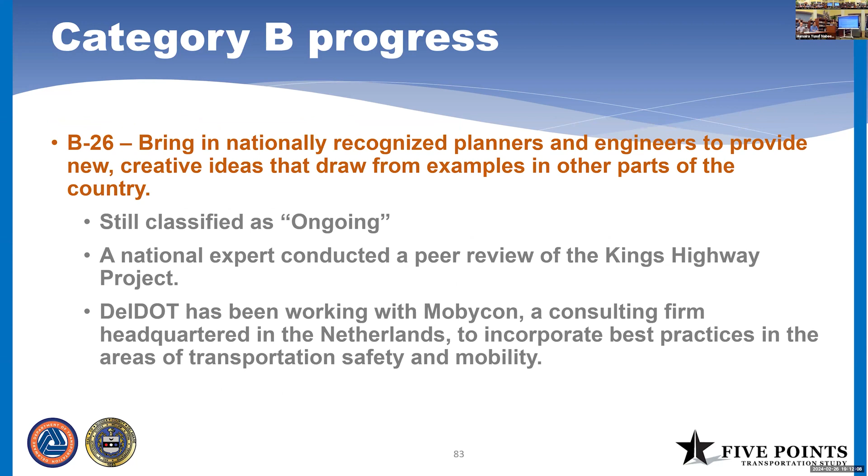Emergency vehicle preemption. We know with Beebe Hospital here in town and it being a little hard to get to from the main drag, getting emergency services to the hospital is really a priority. We also know that can wreak havoc with the synchronization of signals on Route 1. So we have some things in place at the TMC with Gene to work on that. It's a work in progress, but with all the new technology coming in place, that still remains a critical priority. Unfortunately Glenn with Sussex Emergency Services had to leave earlier this evening because he actually had an emergency to respond to, so we're happy to have him on the working group representing the emergency response community.

I'm going to move through that one - we talked about that last time.

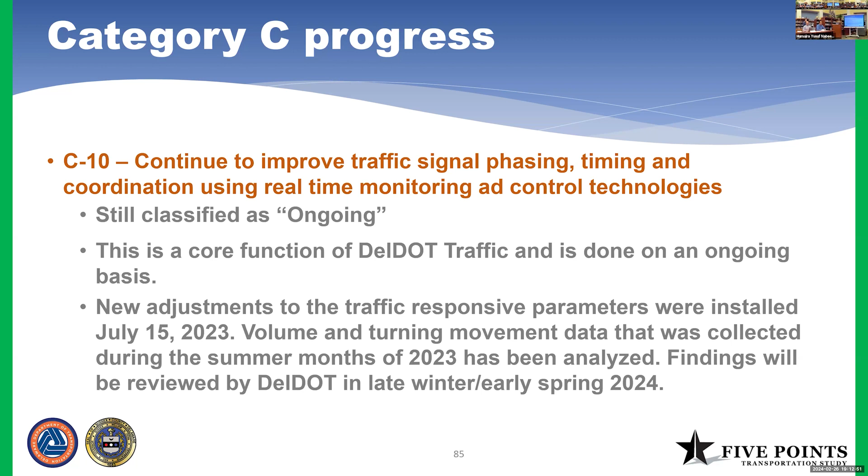Moving into existing roadway infrastructure to complete here. These are both traffic issues: continue to improve traffic signal phasing, timing, and coordination using real-time monitoring. That is ongoing - I hope you heard from Gene tonight and from our engineers that this is really a core function of what the department does. We are always working to optimize how vehicles and all users move through the transportation network so that they are safe and getting to their destinations on time. We recently processed a lot of new findings from Route 1 and we'll be coming back to you soon with more feedback on that.

And lastly, we needed to identify turn lanes in the area. We've done an extensive survey of all the left turn lanes throughout the 5-Points study area for improvements. They've been inventoried, lengthened where appropriate, and or added to existing projects with Brian's team. So that one we are considering complete, because I think we've checked off practically every intersection at this point.

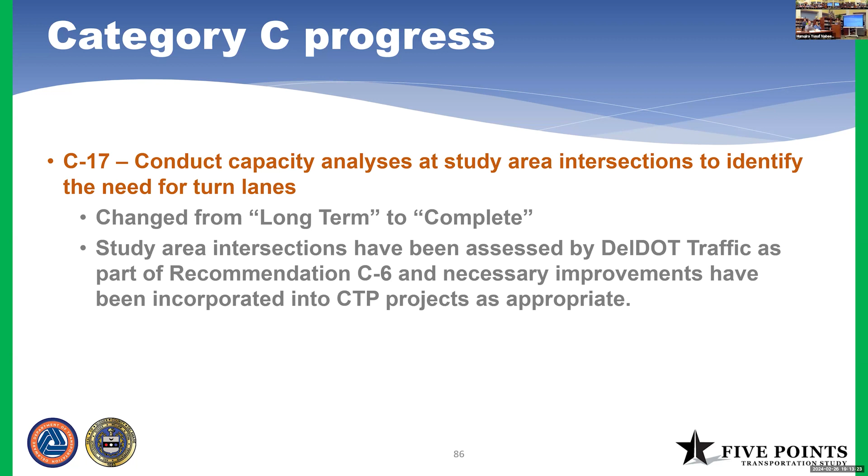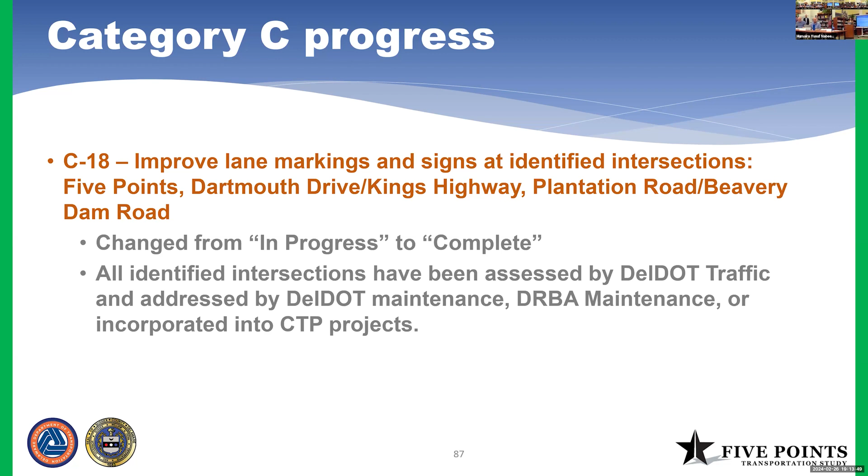It's great news. And similarly, improving lane markings and signage - there's been extensive surveys with our maintenance division out making upgrades and repairs to signage and lane markings as appropriate. As many of you may know, some of our roadway is under the control of Delaware River and Bay Authority, not DelDOT, so for some of those we have to extend those recommendations to DRBA to take care of, but we're working on it as we can.

Moving into our multimodal improvements. One recommendation we haven't talked about in quite some time is to put a median barrier in Route 1 so folks can't cross at unsafe crossing locations. This is a problem statewide where we have unfortunately high crash rates for people walking or biking crossing at the road where they should not be. So I wanted to let you know the traffic team is working on a project nomination to get grant funding to incorporate some of that in areas where we have higher crash risks.

And lastly, category E are big picture things. Here is one we are ticking to complete, which is evaluating the potential benefits of a new roadway connecting Route 1 north of 5 Points to the Vineyards area. That evaluation has happened.

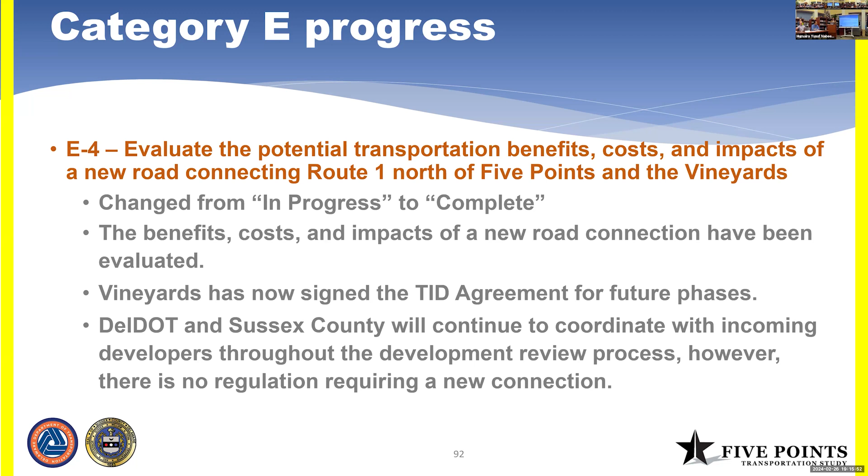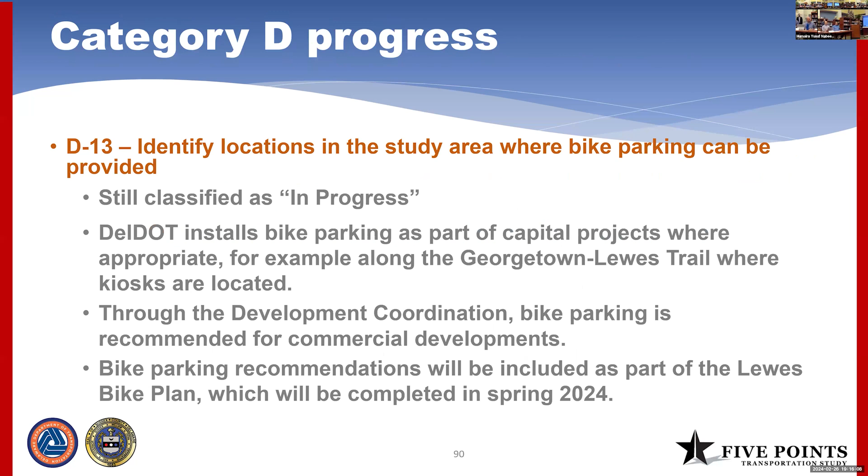On slide 89, you said a barrier type treatment along the entire length of SR1 in Sussex. Does that mean the entire length? It means we're looking at the entire length, but we really want to target those improvements in areas where we have a crash problem. Obviously the longer we go, the more expensive it is. We're all limited in what we can do in land.

So a couple of things on this one. This recommendation was specifically for deterring pedestrians from crossing at basically unmarked locations, if you will. So there's that component. If you think of driving through Dewey, we worked with the town to install a decorative, kind of, it's not a fence, but it prevents folks from crossing, and it's been pretty successful. So in areas where we're truly talking about pedestrians, it's a variety of different things.

So up on Route 13, we are installing our first median fencing. In the New Castle area, near the airport, we have a ton of pedestrian crashes that happen up there. We've built sidewalks, added lighting, done all of the pedestrian safety countermeasures that you can do, and folks are still being injured. So now we're just going to prevent them from being able to cross, except at a signal.

So we're actually installing fence and/or barrier with fence on top of it for several miles of Route 13 to try and, again, we have to do all we can to improve safety. So if we've done all of the other things and still haven't solved the problem, this is kind of our next step. This is the first time we're doing that type of improvement related to pedestrian safety, so we're going to see how well that works. But there would definitely be the opportunity for that along portions of Route 1.

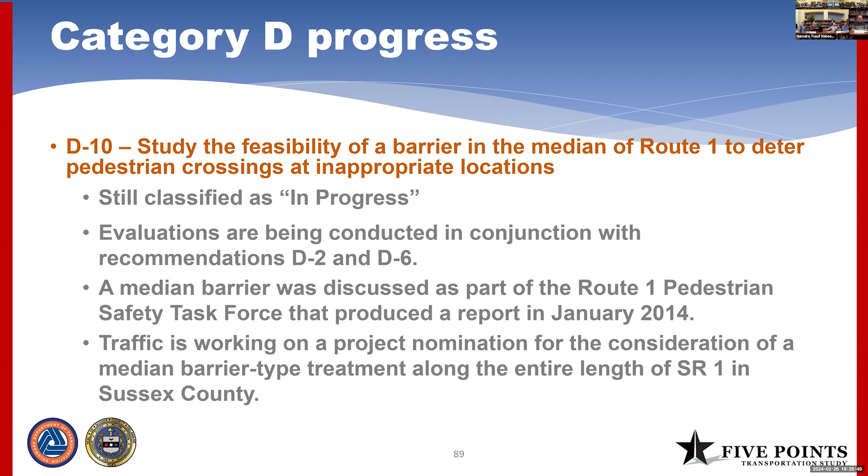Agreed. Okay, yes, DJ. Yeah, I think the pedestrian barrier in the median is a good thing, and also with the high school here and the Kings Highway project, that should be added to that project as well, having a 4-lane highway there from the high school.

As far as the traffic data we're collecting with loop detectors, cameras, and all that stuff, that's great that we're not throwing that data away. So we're going to analyze some of that data, and we can do it basically real time now. But my question is, are we just analyzing service volumes that are crossing the stop line and area of the intersection? Or are we collecting demand traffic count data that includes all the cars trying to get to that intersection? Because when you have to sit through 2 or 3 cycles, you're not getting the actual data you need if you're just collecting service volumes.

Maybe a question for Gene. As I said, we have detectors along open sections and so forth, and as the technology advances, you'll get better data. But we have thousands of things we're connected to from 20 years of building the system. So we agree with what you're saying, and I look at that data all the time. So we are collecting data in between intersections.